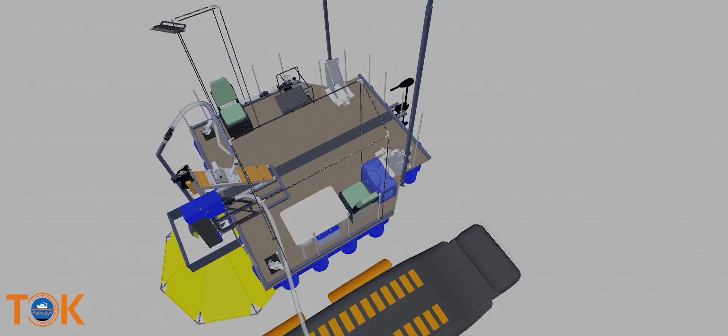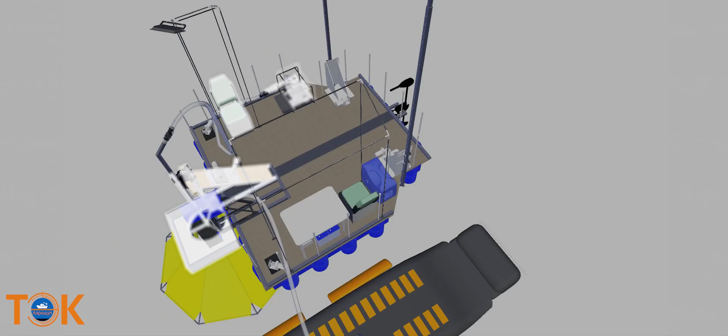There are 2 work positions at the unit. One to monitor the unit. Nearby there is a motor pump, a gas water mixture supply unit, and a crude oil skimmer. At the moment the pump is started and until the sector is finally cleaned, the worker conducts visual control of the process. The second work position is to control the movement of the air probe.

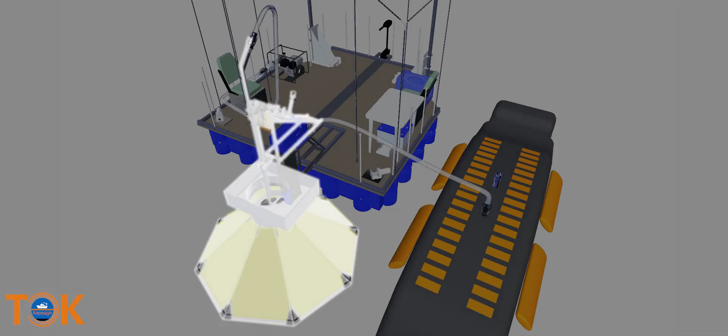The movement of the air probe is carried out by 2 winches that pull up the pontoon and 2 anchors for exact positioning of the air probe. The winch lowers the probe from the transport position into the working position. The working position is shown. The probe sinks to the bottom and does not allow the collected oil to spread.

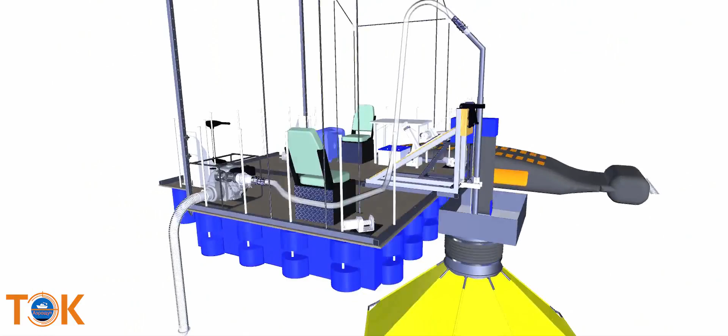When the installation is brought into working position, the motor pump draws water from the lake and supplies water to the injector. Once in the injector, water is mixed with air and fed to the probe. The supplied mixture gets to the bottom through the nozzle and rises to the top together with petroleum products. The probe allows to lift the mixture into the process tank.

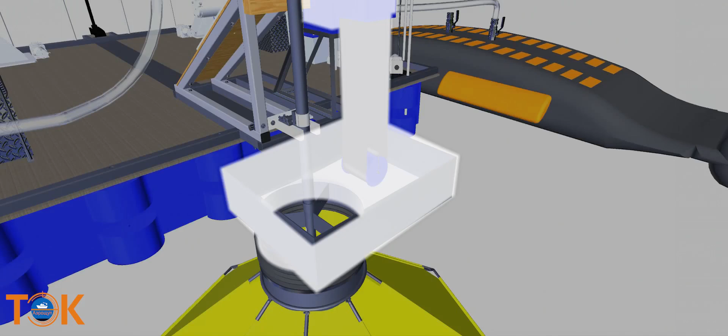The oil products in the sink stick to the skimmer tape, so the oil products are separated from the water. Oil products are automatically removed from the skimmer belt with a scraper. The rate of removal of petroleum products by a skimmer is 150 liters per hour. The oil products separated by the skimmer drain into the floating sealed tank for further transportation to shore.